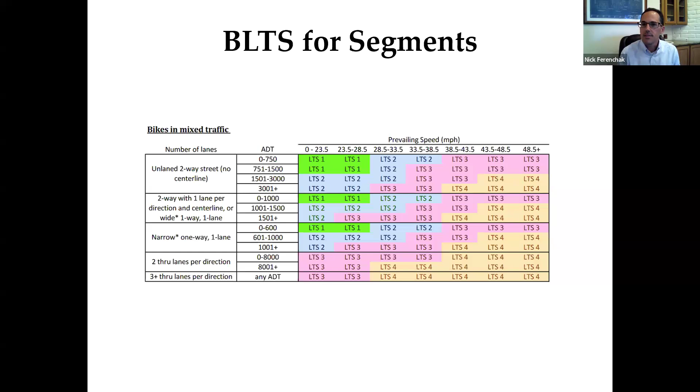The other end, LTS 4, would be the highest stress facility. That would be like riding on a roadway in mixed traffic. That's probably going to be acceptable to the fewest number of prospective bicyclists. So again, as you can see in this figure, for a segment, relatively straightforward, number of lanes, vehicle volumes, vehicle speeds, and we can figure out that LTS.

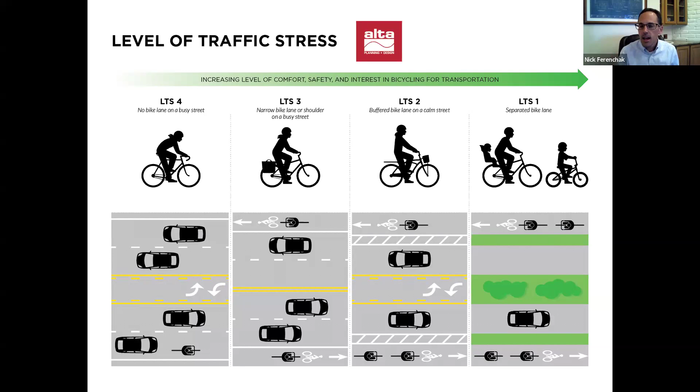Intersections are a little bit more complicated. So really what we're trying to do with this intersection LTS is we're going to create criteria so that you can determine the LTS of every crossing, but really we're trying to identify what we consider critical crossings. And that's going to be when a crossing is higher stress than the segment that it is on.

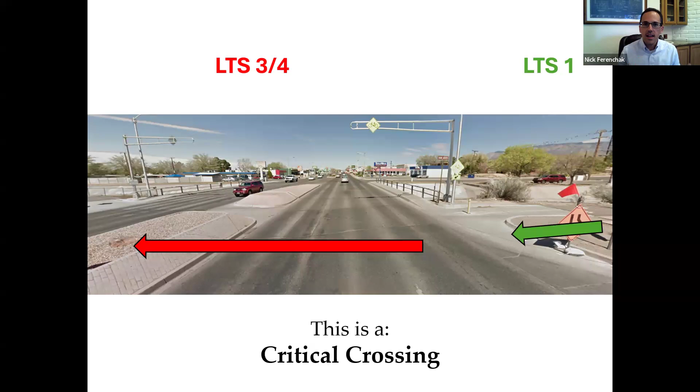We're still trying to 100% nail down the exact criteria. But all to say that this is what we consider a critical crossing. So a low stress segment with a high stress barrier in the middle of it. That's really what we're trying to identify with this project. That was an extreme example, but there's plenty of examples on road as well.

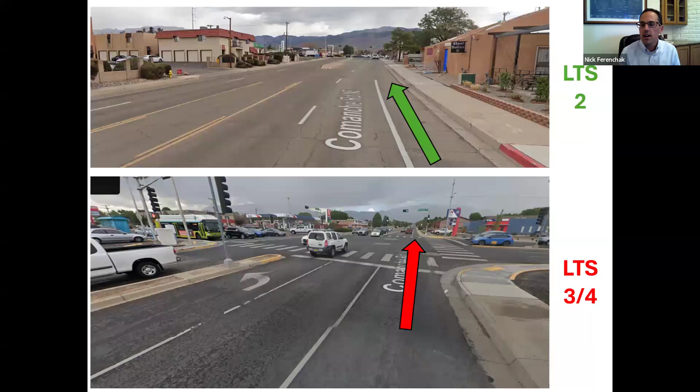So with this example, you can see on the top, we've got a bike lane on a collector, relatively low volume, low speed. According to the tables, that would be an LTS 2 segment. But you can see that the bike lane drops off as we're approaching this intersection here. It's an intersection with a 6-lane arterial, high volumes, high speeds, left turn conflicts, right turn conflicts. So that would be, again, a higher LTS. That would be another example of a critical crossing that we're trying to identify with this project.

So that's the overall goal of the project. We really see it as 2 different parts. Intersections are complex, right? There's lots of different variables that could introduce stress at an intersection. So we first want to identify all those possible variables. We want to talk about those variables. And that could be useful if a city is trying to run an LTS analysis of a single intersection.

But also the other side of the project is that the beauty of LTS is that you can analyze an entire connected network. So if you're working on the citywide level, you might not have data on every single variable that is going to be pertinent. So we do want to think about all those variables that are important if you're looking at a single intersection, and then try to boil that down to understand what is most important, what are we realistically going to have data for, so that we can run an analysis of an entire network.

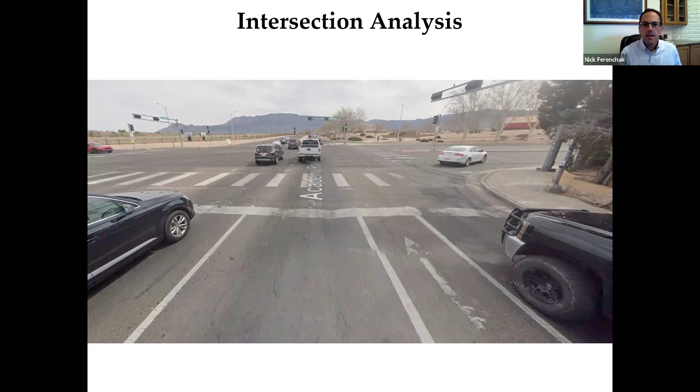So thinking first about all the important variables with an intersection. So really it's about conflicts with vehicles. So we've got left turn conflicts. Ideally, we would know the number of turning vehicles. We would understand signal phasing. Is this left turn protected? Is it permitted? We've got right turn conflicts of vehicles turning onto the roadway that the bicyclist is riding on.

And in this picture, I'm assuming the bicyclist is moving straight across this intersection. So we again want to know number of turning vehicles here. Is right turn on red allowed or prohibited? Is there channelization for that right turn? Detection, probably not going to be an issue with this large intersection, but at some smaller intersections, maybe the signal doesn't detect you. You would have to get off your bike, walk over and hit the pedestrian button. Of course, as always, vehicle volumes and vehicle speeds on the roadway.

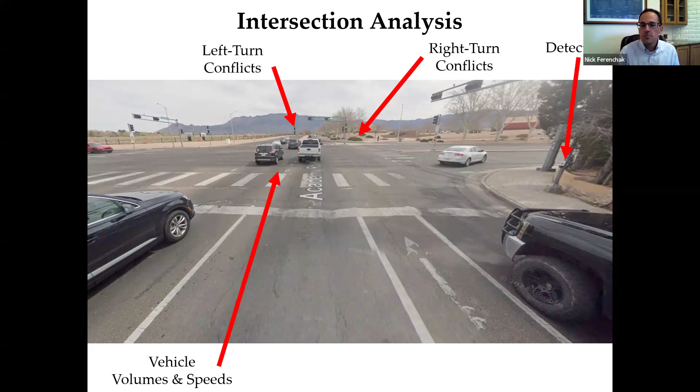At some of the larger intersections, we might want to account for refuge. And then also the bike lane configuration. So does that bike lane drop off? Does it go to the intersection? Does it go through the intersection? And how are the right turning vehicles that are coming from behind you interacting with you in that bike lane? So a lot of different variables that we want to account for.

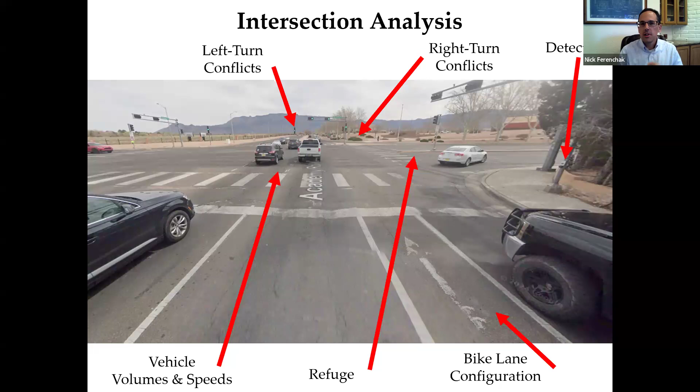Now we're trying to figure out what are the most pertinent variables? How can we boil that down so that a city can actually use this tool for an entire network analysis across their entire city. So I'll provide the framework. We don't have all the LTS values plugged in quite yet, but I'll provide the framework for kind of the direction that we're hoping to take this project.

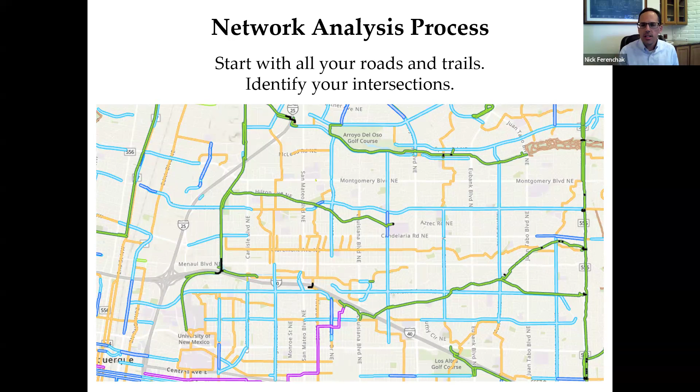I'm imagining for the entire network analysis that we're starting off with, you have a GIS layer of your entire network, roads and trails. With that network, you can then identify all of your intersections, and we're going to break those intersections apart into 4 main categories. So if you've got an intersection of a trail intersecting with another trail, that's going to be LTS 1. You really shouldn't have any vehicular conflicts at that type of intersection. If you've got an intersection of a trail crossing a road, like you can see in the picture below, now we're really concerned with gaps in the vehicle stream.

We hopefully should not have to be concerned about turning movements at one of these intersections. Hopefully no vehicles are turning onto the trail. But we're really just looking for gaps to cross this road. So we're going to be concerned first and foremost with traffic control. You can see with this crossing, there is no traffic control. There's a little bit of signage.

But you could have a situation where you have yield, like an RRFB or some kind of flashing beacon. Or you could have full traffic control, maybe a pedestrian hybrid beacon at the trail crossing. So what kind of traffic control is there? What kind of refuge is there? And then the number of lanes for the roadway that you're crossing and the vehicle volume and speed.

And this is one thing I'd love to get input from folks in the audience. Which variables are going to be most important for you all? Are any of them redundant? Which variables are cities regularly going to have data for? Specifically, I'm thinking about vehicle speed.

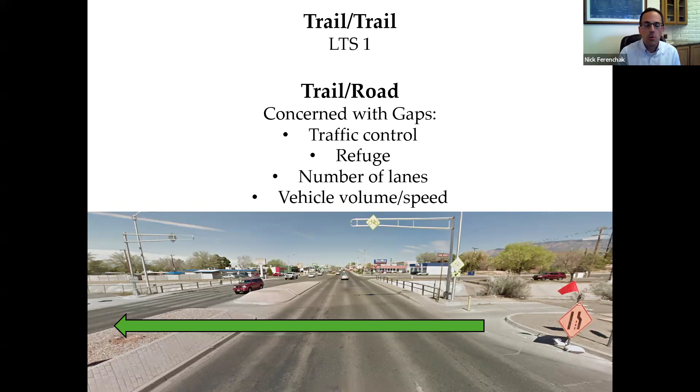At least in Albuquerque, you can assume that any 6-lane roads like this are going to be signed at 35 miles per hour. Any 4-lane roads are going to be signed at 30 miles per hour. And any smaller roads, 2-lane roads, are going to be signed at 25 miles per hour. So do we need to know the vehicle speeds in addition to the number of lanes? Can we just use number of lanes and functional classification? What would be the best combination of variables to use for a network-wide analysis? So those are the first 2 types of intersections.

Then we've got road intersections, and we're going to break those apart into 2 different types. So first we've got unsignalized intersections. With the unsignalized intersections, I'm assuming that the movement is across the primary roadway, so that bicyclist is stopped at that stop sign. So once again, it's fundamentally the same as what we were looking at before, where we're looking for a gap in the traffic. This is a little more complicated because now you can have turning conflicts, but fundamentally it's a problem of gap acceptance.

For the unsignalized intersections, we're really not concerned about bicyclists on that main arterial. If a bicyclist was riding on that main arterial, there is no bike lane, so it's LTS 4. You're not going to have any critical crossings on that roadway. If there was a bike lane on that arterial, the bicyclists would have right of way through this intersection if they were on the arterial. So really, we're just concerned on the secondary roadway crossing the main arterial. That's our main concern there.

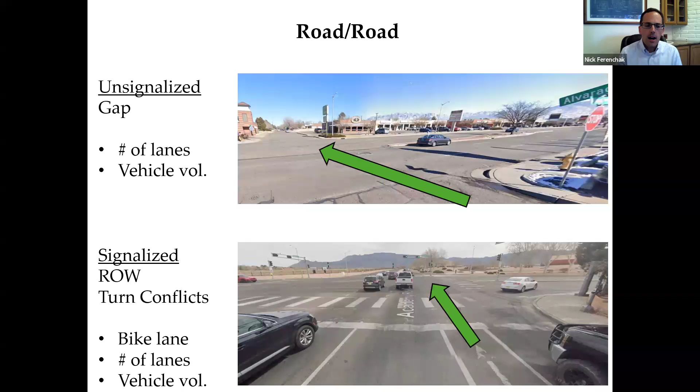Signalized intersections, this one will then be different. So we're assuming that the bicyclist is going straight across the road here. They've got the green light, so they're not looking for a gap. Really, what we're concerned with here is turning conflicts. So now we're considering, what is the bike lane doing? Does it drop off? Does it go through the intersection? And once again, we're concerned with the number of lanes, not just of the road that you're crossing, but also the road that you're on, because that might be an indicator of the total number of turning conflicts. And then also the same question of vehicle volumes, vehicle speeds.

So that's fundamentally what we're trying to accomplish with this project. That's the basic framework. To fill in that framework, we're hoping to get input for validation of the LTS values. So please keep an eye out for that. Once the framework is finalized, we'll get it out there into the world to get diverse viewpoints on the LTS values. And then we're hoping to have some preliminary results for this project in summer 2025.

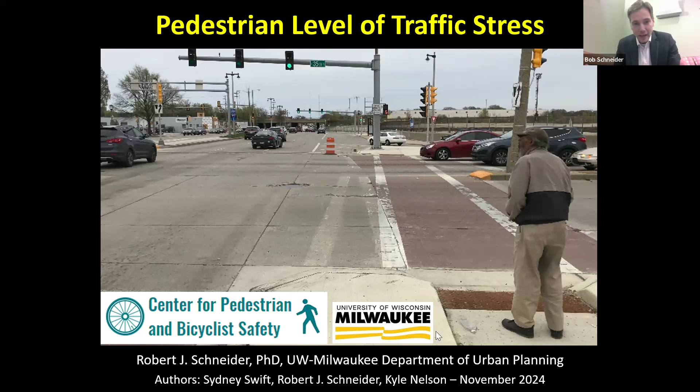And now we're moving to the phase of putting it out in the world and seeing how well it works, and then going through some validation and refinement. So that's what I'll talk about today. As Nick was mentioning, level of traffic stress is a concept that really simplifies perceptions of traffic safety in the roadway environment. In this case, we're focused on pedestrians' perceptions. And there are methods that exist to evaluate pedestrian comfort in various ways, or pedestrian level of service in the Highway Capacity Manual.

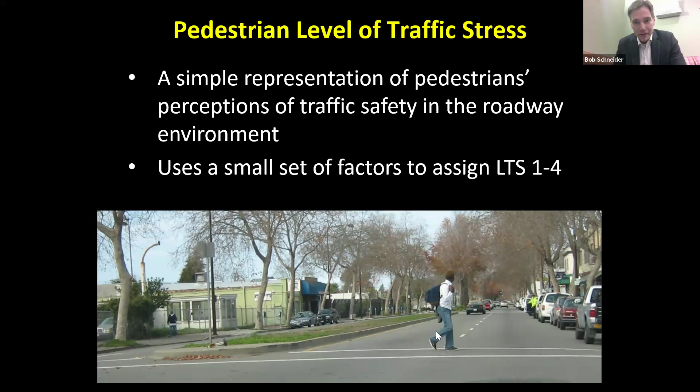But what we're really trying to do is simplify the many, many factors that could be involved in pedestrian perceptions of the traffic safety environment down to just a few, the most critical ones, and then assigning a level of traffic stress of 1 through 4, similar to the bicycle level of traffic stress, for pedestrians.

So I'll go through some of the origins, the variables that we use, then give a couple of examples how we've applied the PLTS, and then go through a few next steps that we're working on during this year of research.

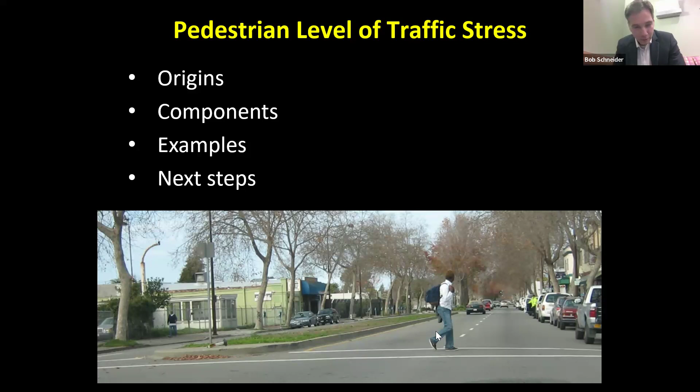So Nick again gave a good overview of this. The BLTS was first adopted in 2012 as a part of the Mineta Transportation Institute research. And it really took off from there. Simplified tables that we're working with. But at that time, there wasn't any similar method for pedestrian level of traffic stress.

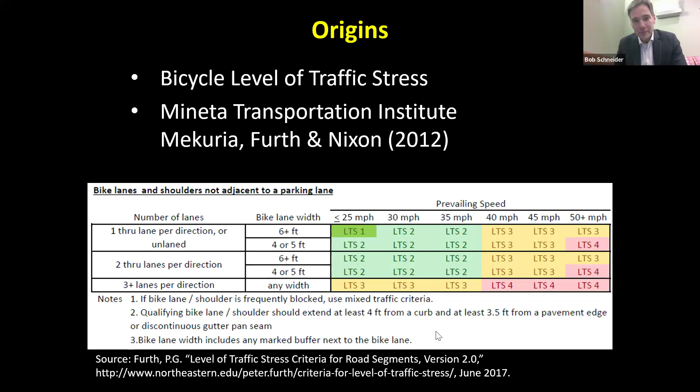And so we drew upon their experiences and the methods that they established to try to create something that could be more uniform and applied throughout the country. These methods have actually been adopted in a couple of different ways as consultants have worked in various other communities and applied them. But there isn't necessarily a standard accepted practice for PLTS yet. And so that's what we're working on.

So our method is rooted in those previous applications, but we also looked at the pedestrian suitability literature. In other words, what are the factors that academic studies have identified as being associated with pedestrian comfort or suitability, especially with respect to traffic risk. And so we had a number of research syntheses that we looked at and identified traffic characteristics, pathway conditions, land use and built environment characteristics, a number of other variables that have been identified in the literature.

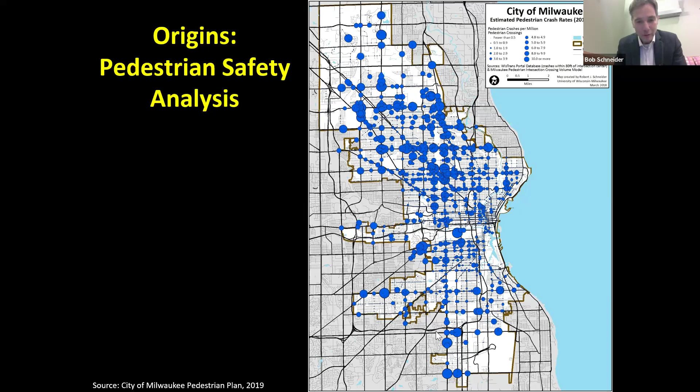And these locations with high pedestrian crash rates tend to cluster along high traffic volume, higher speed, and multi-lane arterial streets. So those are some of the characteristics that you'll see when I get into the pedestrian level of traffic stress that are important for determining what stress level exists.

Many of you are familiar with the concept of a high injury network. And so these locations are often along these multi-lane, high-speed, high-volume arterials. And our method of pedestrian level of traffic stress is likely to be able to identify some of these locations.

We are interested in the future to map the locations of high PLTS as well as crashes, but that hasn't been done yet. But in theory, we think that a lot of the same variables expressing that relationship between roadway design and safety will likely be there.

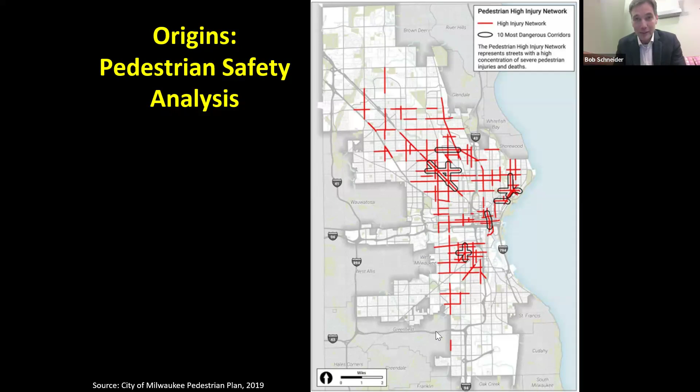Pedestrian safety guidance also gives us some intuition about what to include in our pedestrian level of traffic stress. So this study from the Federal Highway Administration, it's the guide for improving pedestrian safety at uncontrolled crossing locations. And there's a number of types of treatments that can be used: reducing the number of lanes, having curb extensions, pedestrian refuge islands, various kinds of rapid flashing beacons, pedestrian hybrid beacons.

These are facilities that have been noted to have a positive safety impact and are likely to reduce the stress of a crossing. And so these are some of the same types of treatments that we include in our tables for the pedestrian LTS.

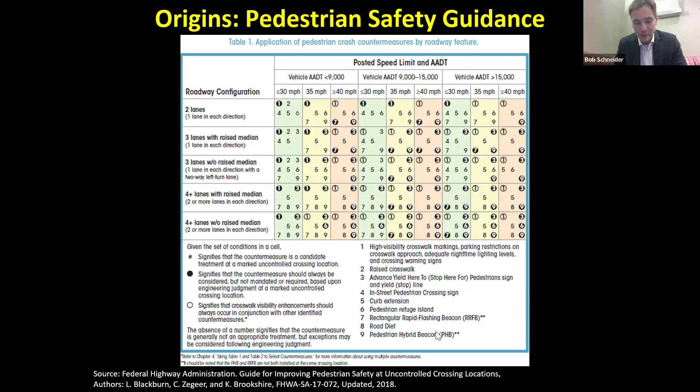We mentioned the concept of sort of special ability in PLTS 4. That gets to the idea that these are likely locations that people who have disabilities, people who are kids or have other challenges crossing the street are not going to feel comfortable crossing. Whereas PLTS 1, that should be comfortable for everybody. I said crossing in PLTS 4. It's either crossing or walking along the street.

We have 2 different types of assessment. I mentioned them both already. One is the PLTS for walking along or traveling as a pedestrian along a roadway segment. And then there's a second one for crossing a roadway segment. So first, for traveling along roadway segments, we look at these 5 variables: traffic speed, motor vehicle volume, sidewalk width, paved shoulder width, and then the buffer between the motor vehicle travel lane and the pedestrian space. These factors have been around for a long time in terms of pedestrian suitability analysis. Many of these were accounted for in some of the original pedestrian level of service work that was done by Sprinkle Consulting for Florida DOT back in 2001.

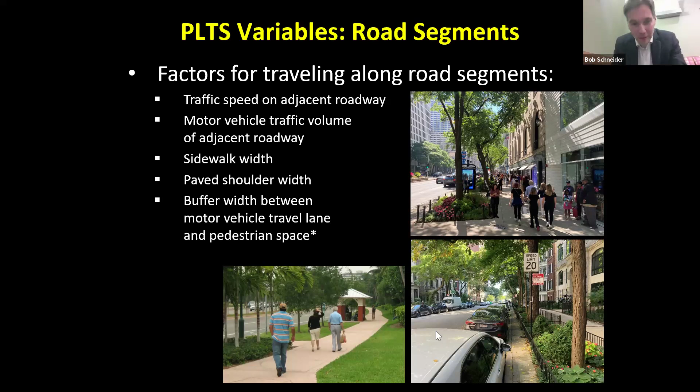So getting into the tables to assess which of the traffic stress levels does your roadway segment fall into. Table 1 just shows if you have a segment with no sidewalk, traveling as a pedestrian in that area is going to be more comfortable if it's very low speed or very low traffic volume. If you don't have a shoulder to walk on, then really you only get level of traffic stress 2. If there is a shoulder and you have a very slow speed, you may feel very comfortable in level of traffic stress 1. But anything more than 25 miles an hour where there's no sidewalk, that is a PLTS 4.

Looking over on the right side, we have roadway segment categories divided up by those critical variables of speed, sidewalk width, and buffer width. So as you see, as speeds increase along the roadway, the traffic stress goes up. As the buffer distance becomes smaller, the traffic stress goes up. And then as you have narrower sidewalks, the traffic stress goes up. So we really want lower speed, wider sidewalks, more buffer to give the most comfortable, least stressful type of experience for pedestrians.

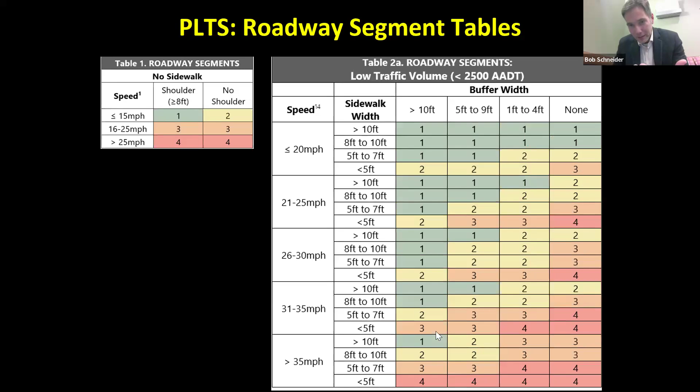The traffic volume here is important to note because we have 3 different tables, one for low traffic volume, one for moderate, and one for high traffic volumes. I'm just going to show the low traffic volume one here and then switch over to the high traffic volume. In this case, we made our split points at 2,500 ADT and 7,500 vehicles per day. So when we see the one with the higher traffic volumes, you can see there's much higher stress levels involved. Walking along that roadway with more cars going by is a more stressful experience.

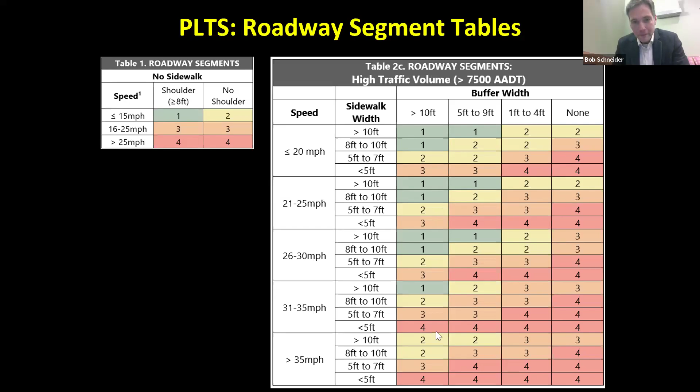Then we have the roadway crossing variables. So the factors we consider there, very similar to walking along the roadway. First of all, traffic speed, number of lanes being crossed, presence of traffic signal, speed and lanes being similar to the walking along the roadway. But then we have 5 more factors that have to do with the crossing condition itself. So is there a traffic signal or pedestrian hybrid beacon? Is there a stop sign? Is there a refuge island, a median island, curb extensions? And then is there a high visibility crosswalk with rapid flashing beacon?

The final 3 of those, we think, many communities won't have those on hand. So again, these are ones that could potentially be omitted when we think about a network-based approach, but that's something that we continue to work on.

I want to just talk a little bit about the traffic speed variable. It's important in both the traveling along the roadway and crossing the roadway level of traffic stress. Most communities probably don't have 85th percentile speeds or some measure of actual traffic speed. So in our report, we write that you can use the posted speed as a proxy for the traffic speed in identifying which place on the table to look up the LTS.

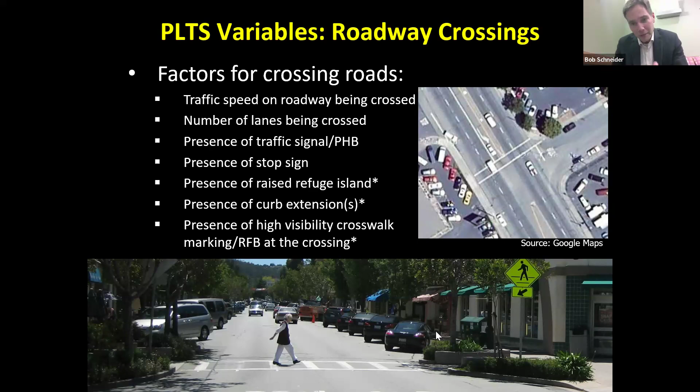However, we know that traffic speed is incredibly important. And if you have a high level of speeding along a certain corridor in your community, it's even better if you could use an 85th percentile speed to represent that traffic speed category for the assessment of PLTS. It's just a matter of if you have the data available.

If you can have median island and curb extensions, that in general reduces the stress for the crossing. But if you only have a refuge island or only have a curb extension, you'll have slightly higher levels of stress. When putting these tables together, we used our best judgment based on what we've seen from the literature as affecting people's comfort levels. However, whether one cell is a 2 or a 3 or is a 3 or a 4 should be looked at.

And as we apply this and as others apply it around the country and experiment with this first iteration of pedestrian LTS, we'd love to get your feedback on, well, does this seem like it matches with what the pedestrian experience is? And if you have suggestions after you've used it for potentially shifting a number or two around, we'd love to hear about it because that's part of our qualitative follow-up in assessing potential revisions to this method.

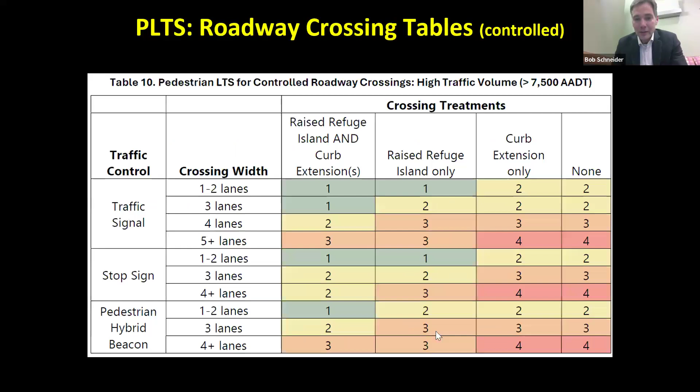Then looking at uncontrolled roadway crossings, many of the similar concepts are here, but this would be if you have traffic control of a rapid flashing beacon, for example, or no traffic control. For example, just having a marked crosswalk, but no other crossing facilities. And so you can see in these cases, if you have the refuge island along with high visibility crossing marking, these each have an effect, but looking back to the other one, there's none of these except the very slowest speed and crossing width of only 1 or 2 lanes that get a PLTS 1.

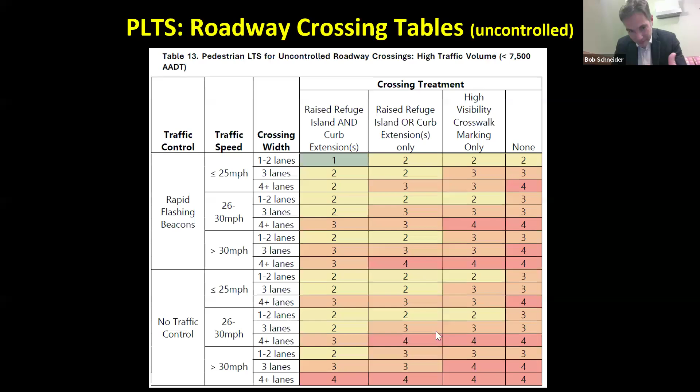Uncontrolled roadway crossings are some of the least comfortable and most stressful experiences for pedestrians. And so you can see that reflected in this chart, especially as the traffic volumes and the number of traffic lanes increase.

Another important piece of the approach that we have put forward is that any crossing that doesn't have accessible curb ramps automatically gets a 3 or 4. Crossings need to be accessible for everybody. And so that's a judgment that we decided to add into this tool. If you don't have an accessible way to get down the curb, you end up with people crossing in other locations that they can get down to the roadway surface, and that can lead to people being in the roadway and having a very stressful experience.

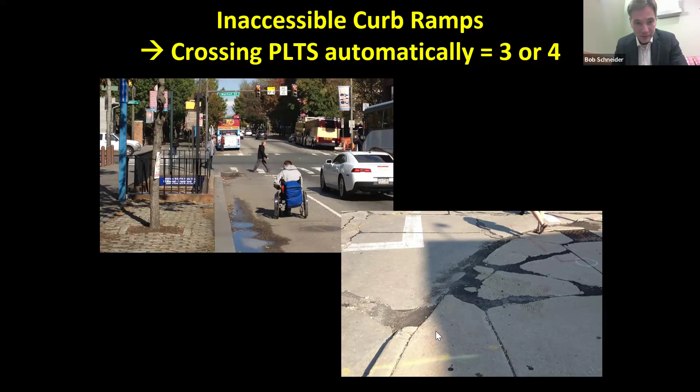I want to give a few examples of our applications of pedestrian level of traffic stress. Several of these are from Wisconsin. So Sydney Swift, when she first developed this tool, she did the PLTS for all street segments in Shorewood, Wisconsin, which is just north of Milwaukee, a city of about 14,000 people. And she identified the segments that have these different PLTS levels. There's no PLTS 4 in Shorewood, but several of them have PLTS 3. These are major arterial streets.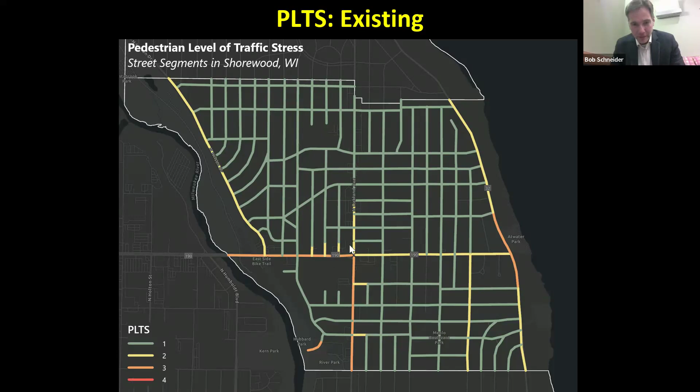And if you can see my pointer here, this is Wisconsin Highway 190, and it has 4 lanes. It does have a median island, but it's a 4-lane, very high volume arterial, more than 20,000 vehicles per day. There's 4-lane sections of Highway 32 over here, but they narrow back to 2 lanes when you get away from this Atwater Park area. And so you can see how the PLTS changes for the roadway segments in those locations. This is Oakland Avenue. It has very high traffic volumes along it as well, but they get lower as you go north along that corridor. So intuitively, it seems to reflect what the experience is in that community for walking along the roadway.

For crossing roadways in Shorewood, Sydney zoomed in on sort of the heart of Shorewood's commercial areas and surrounding neighborhoods to show what the PLTS was for crossing. Now, she didn't do the entire city of 14,000 people because it takes a lot more effort to collect the data needed for the crossing LTS. But in this smaller area, you're able to see this.

This is the Highway 190 or Capitol Drive. A number of these crossings are PLTS 4, the multi-lane 30-mile-an-hour crossings. In some cases, there's a refuge island. In other cases, there's not. When you look at the neighborhood streets, some narrow 2-lane residential streets with low traffic volumes, crossing those at the heart of an intersection, that is PLTS 1.

Something that I should mention about practical application of the crossing tool is that each of these intersections here has 4 crossings to it, or 3, depending on whether it's a T intersection or not. The PLTS that is assigned to the intersection at the intersection level is the most stressful crosswalk of all 4 or all 3 that are there.

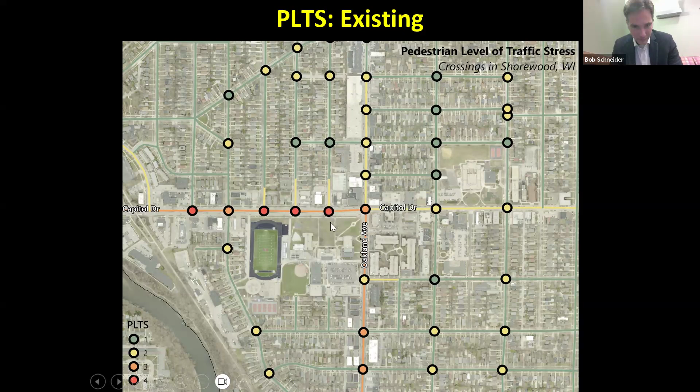So you may actually have relatively low stress experience walking along Capitol Drive and then crossing the minor streets that tee into it, but crossing Capitol Drive itself is a very stressful experience. And so the intersection got rated as a PLTS 4.

Another example, looking at specifically segment PLTS, we were able to look at a before and after situation in Egg Harbor, Wisconsin. In this corridor, one of the county highways, they added a sidewalk along the south side of the roadway. And so it went from this very narrow shoulder that people scooted along to now a walkable sidewalk. In looking up the tables there, this was PLTS 4 in the previous configuration, and now with the new sidewalk, it's PLTS 3.

One thing that could potentially be done in the future is, this is a 30-foot curb-to-curb cross-section. If this was striped with 2 travel lanes and then 2 5-foot bike lanes on either side, that 5-foot bike lane would be counted as the buffer area between the moving travel lane and the sidewalk. And that would allow the PLTS to go down to 2. So that's something that is also accounted for. They could also put in a grassy buffer or planters along there too, to be counted as a buffer.

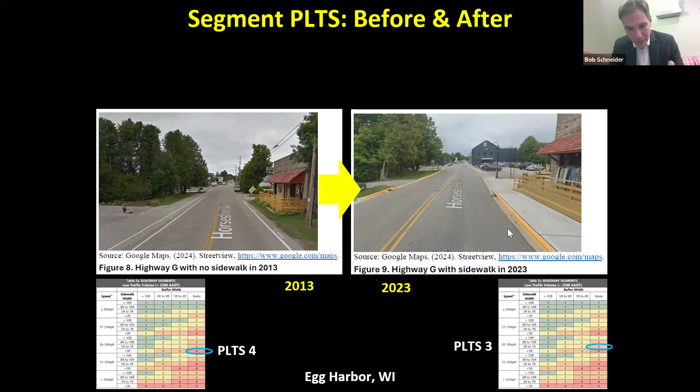Because we're simplifying this method, we don't make a distinction between different types of buffers, even though having planters or trees might be a different experience than walking along a roadway with just a grassy buffer or just a painted bike lane. But we're trying to simplify the process so that it can be relatively easy to apply.

Another example from the city of Milwaukee. They've just completed a Van Buren Street transformation project. This is the conceptual drawing of it prior to actual construction. Before it was reconstructed, Van Buren Street was a 4-lane undivided arterial street. It did have bike lanes on either side, but it was not as pleasant for pedestrians, especially to cross.

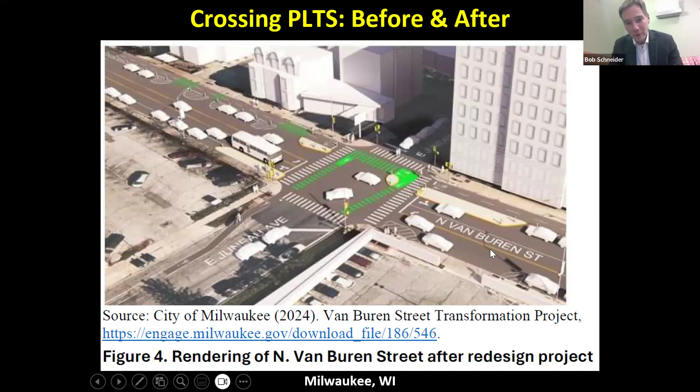And so this new configuration provided a 2-way cycle track on the east side of the street, provided some refuge islands for crossing, as well as in-lane bus boarding islands, and reduced the number of lanes from 4 down to 3 at each crossing. So based on that, we were able to assess the crossings before and after this project.

And what had previously been mostly a PLTS 4 or PLTS 3, all the crossings under the new design are PLTS 2. So we can see that improvement. And as somebody who goes across this on foot fairly often, I definitely feel less stressful going across Van Buren Street.

Now, there's a number of considerations that I've been alluding to throughout, but are really important to be aware of. Obviously, one of the most important is that pedestrian LTS is necessarily simple. We want a tool that can be easily used. Now, you don't need to have a special spreadsheet formula, even though we could potentially enter this into a spreadsheet tool at some point. You can just go to a lookup table and see what the PLTS is.

But PLTS is only one representation of the experience, and how we should be planning for pedestrians. It doesn't account for sidewalk heaving and other surface disruptions that may make a sidewalk inaccessible, for example. It also doesn't account for a number of other aspects of what's required for ADA. We wanted to include curb ramps, but you should complement the PLTS with an ADA accessibility assessment.

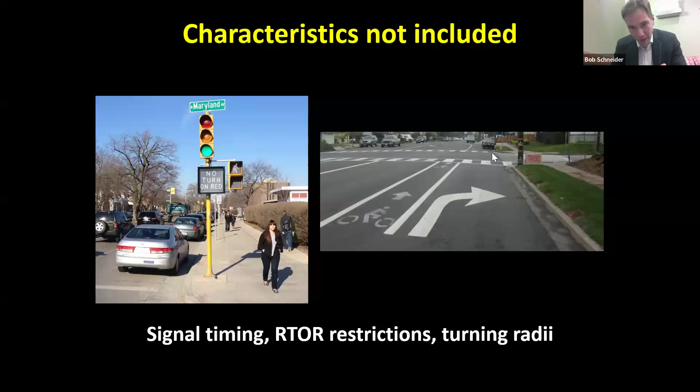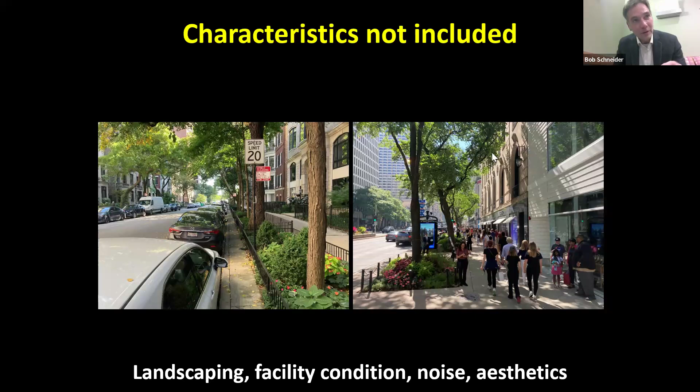The experience aesthetically is also important, but we don't account for this. Landscaping, various conditions of facilities. Is there graffiti, for example? What about noise from traffic? We don't account for that, even though indirectly higher traffic volume would probably be associated with more noise. But that's not measured as a part of our PLTS tool, even though this is important to the pedestrian experience. We're really focusing on the most critical factors that would be associated with perceptions of traffic risk as a pedestrian.

One that I think is really important to consider for the future and is a critical risk factor is roadway lighting and darkness. Those conditions lead to higher risk for pedestrians at night. And if we have walkways and crossings that are better lit, we're likely to have a more comfortable and less stressful pedestrian experience.

Thinking about how to assess this is very challenging. Just saying that there's a light post that has some lighting in an intersection is one thing, but if it really does a good job of lighting up the crosswalk and the crossing area, or the curb area where some pedestrian may be ready to enter the crosswalk, those pedestrian level lighting features are more important than just having a single light post. So figuring out how to assess that and bringing it into this method is something that we'd love to do in the future, but we don't have in the tool yet.

And then this also brings up another key point about pedestrian LTS. Right now, we're mainly targeting it to assess what are conditions like for pedestrians crossing during a peak period time during the day. In reality, pedestrian LTS actually changes throughout the day and throughout the week, depending on how much traffic there is and what the lighting conditions are. The true experience of a pedestrian feeling stressed around traffic does change, but we're aiming for those particular times where the highest activities are occurring right now. It could be that at some point in the future, we have a daytime PLTS and then a nighttime PLTS, and that would be interesting to assess.

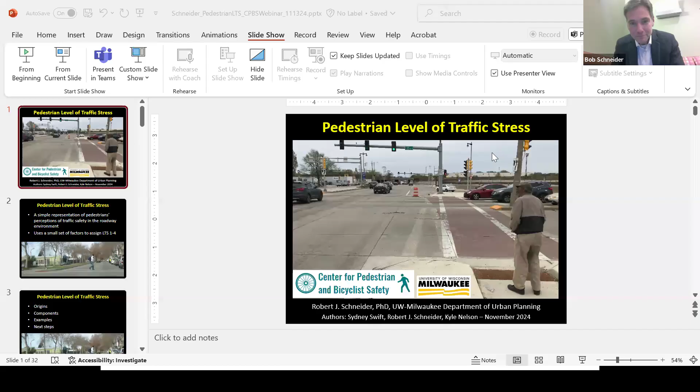Hey, Bob, we've got a few questions in the Q&A box, so I'll just go through and pick a few for you. Sure. Yep. This is from Elizabeth. She's asking, how does parking or lack of parking affect the level of traffic stress with relation to the curb extension? For example, curb extensions are generally not applicable if there is no parking lane.

That's right. So in the cases where curb extensions are, they're going to be streets with on-street parking. And so that wouldn't directly affect the pedestrian crossing LTS, but the on-street parking does affect the pedestrian segment LTS in terms of providing a buffer between where the people are traveling as pedestrians and the moving traffic.

I think it's actually an interesting suggestion I want to think about a little bit more too, because if you don't have a curb extension but do have on-street parking, there may be limited visibility to a crosswalk depending on how close the cars park to it. So that's something that we may want to consider for future.

All right, we've got another question from Salish. Is LTS only about the perceived safety or also the accessibility as far as reaching different opportunities, such as jobs or groceries and so on? If yes, is there any effort in defining how LTS is related to increased travel time for bicyclists or pedestrians?